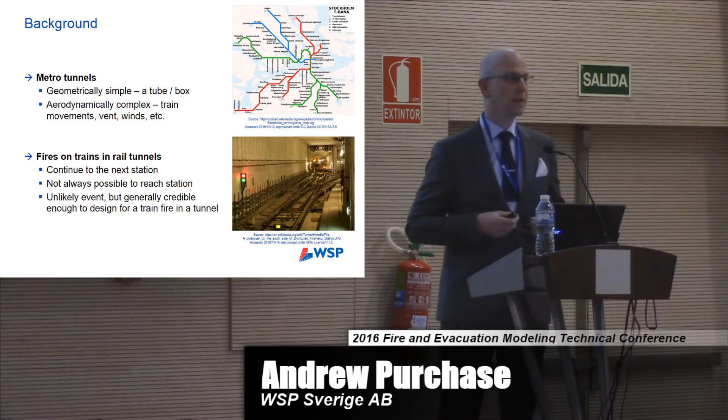Sometimes it might be the case that congestion prevents the train from getting to the next station, or it could be that a mechanical fault or the fire itself causes the train to be stuck in the tunnel, and hence evacuation is required. So whilst it's an unlikely event, it's usually deemed credible enough to provide evacuation provisions in a tunnel.

So what are typical rail tunnel evacuation provisions? Based on a survey of tunnels from around the world, there seem to be some provisions that are pretty typical. It's quite common to have walkways with emergency lighting to assist with evacuation. It's also common to have regular exits once the tunnel gets over a certain length.

But that's where it starts to deviate a little bit. Some provisions tend to vary quite a bit. The one that interests me the most is the longitudinal ventilation. I'm originally from Australia and I've worked quite a bit in the UK and the US, and in my experience at least, it's almost a given that the tunnel will have longitudinal smoke control.

I moved to Sweden about a year ago and I found that that's not always the case. I see examples where sometimes it's provided, sometimes it's not. And that was a little bit conflicting for me, given my previous experience.

The other thing that tends to vary quite a bit is the walkway width. For instance, an NFPA 130 compliant design would tend to have a walkway width of about 0.7 metres. But then there are other examples in Europe where it's around 1.2, and furthermore there are examples where it could be as high as 1.5. The walkway elevation also tends to vary.

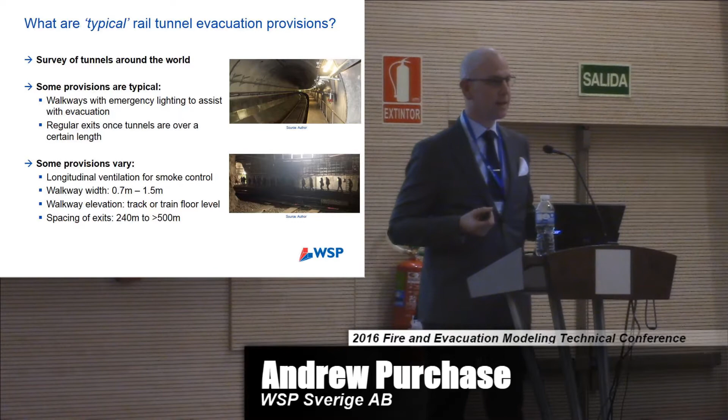Some tunnels have a walkway at track level, some have them level with the train floor, and of course it could also be somewhere in between. The other thing that tends to vary a bit is the exit spacing. An NFPA 130 compliant design would tend to have an exit spacing of around 240 metres, and that would be pretty typical in a place like Australia as well. But then there are a lot of examples when it's greater than that, so it's 300 or it could be 500 or even greater.

So why is there so much variation in what's provided in a tunnel evacuation design? Well, that's quite simple. Things vary around the world. Standards vary, people's perceptions of safety vary. Also, it could be that a system has certain constraints, so you can't provide this, you can't provide that. Or it could be that you're adding new tunnels to an existing system and it's convenient to maintain a strategy, so if the walkway is a certain configuration, you just keep with that for consistency.

I think the problem though is it can be confusing when these provisions are looked at in isolation. Sometimes you'll be working on a project and another design discipline or a stakeholder will come to you, having seen a tunnel somewhere else in the world, and they'll ask why do we have this provision, why don't we have this, and so on.

And you find yourself in the position where you're having to defend your design. You've got to demonstrate an acceptable level of safety, but also a solution that's cost effective and optimal in terms of its impact on other design disciplines. This is particularly the case for tunnels because things like walkway widths can affect the overall tunnel envelope, which then implicates the cost.

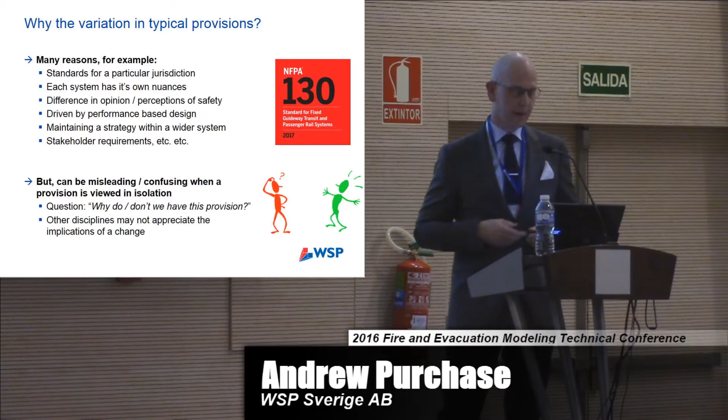Just to give a bit of summary here of what we're trying to achieve and how it could be used. What we're trying to do is investigate a range of tunnel evacuation design configurations and the impact these have on occupant safety. The focus of this is on metro tunnels, but the concept should be equally applicable to other rail tunnel designs.

The way that we did this is we did CFD and evacuation modelling and compared results on the basis of visibility, but also on the FED regarding asphyxiants.

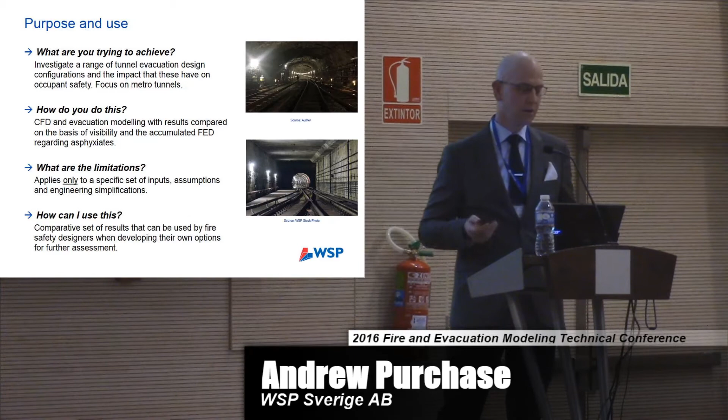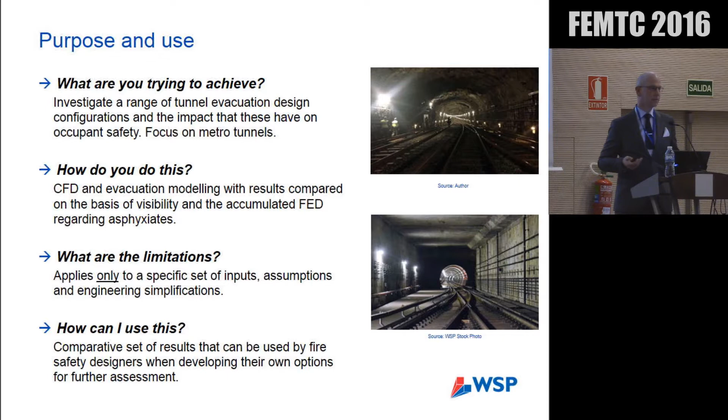As with any analysis, there are certain limitations here. We've used a set bunch of parameters and made simplifying assumptions, so of course the results here only apply to the work that we've done. It could be that if something varied, like the fire size, results or outcomes could be quite different. So the intent of doing this was to provide a comparative set of results that could be used by the fire safety designer when they're coming to design their tunnel. So it gives people something to think about more than anything.

To do the work, we had to come up with some scenarios to analyse. In essence, we did 12 CFD simulations and 144 evacuation scenarios. The table here shows a bit of a summary of the parameters that we looked at, and the ones shown in the highlighting are the ones that were actually selected.

To just touch on a couple of these, for instance, the fire location was selected to be towards the middle of the train, and this was considered reasonable when comparing a ventilated and a non-ventilated solution. If longitudinal ventilation is provided, the typical strategy is you blow it one way depending on where it is in the train, but if it's towards the middle, a judgment might need to be made. So this seemed a reasonable location when comparing the two solutions.

The fire size and growth rate were pretty much nominally selected, and of course this may not represent the absolute worst case for a metro train in a tunnel, but it's probably something that could be a credible design case.

We also looked at different grades, so a flat tunnel and a tunnel with a 4% grade. The grades here are quoted relative to the main occupant movement, so plus 4% is up towards exit 2.

We also looked at different velocity conditions: no velocity at all in the tunnel, a 2 metre per second wind applied as a pressure boundary condition, and critical velocity, which was a fixed velocity boundary condition calculated based on the equations in NFPA 502.

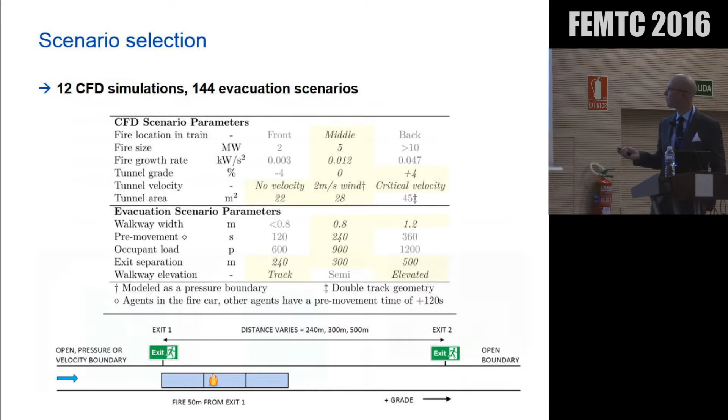Just briefly touch on the CFD modelling. This was undertaken with FDS version 6. The total domain length was 900 metres, which allowed for a 140 metre long train and exits of 500 metre separation or greater.

Each model had devices for measuring tenability, so visibility, temperature, and so on.

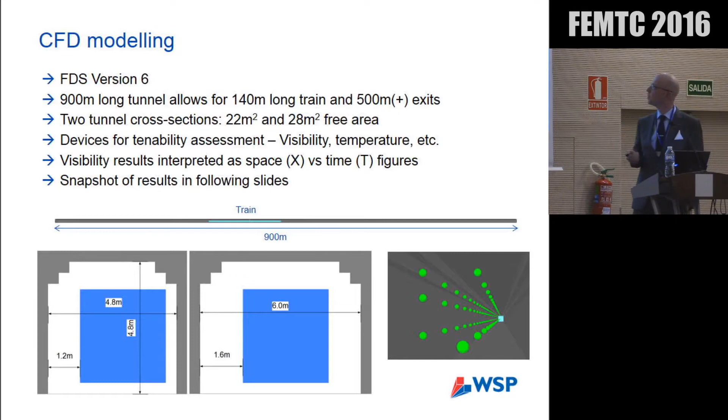The results for visibility are presented here as space versus time, or XT plots. These plots show the distance along the tunnel along the x-axis and the time in minutes along the y-axis. The train is shown as a blockage here, and the exits, or different exit spaces, are shown as vertical lines.

The colour bars have been clipped at 10 metres, so anything greater than 10 metres is shown as white, and the colour bar shows the remaining contour levels.

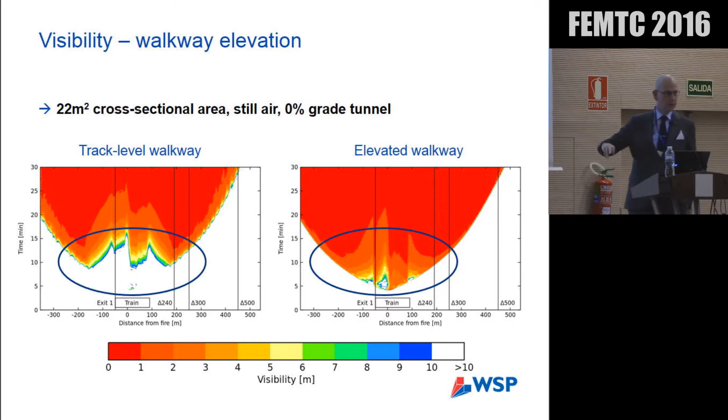So from these results, the ones on the left here are the track level walkway and the elevated walkway. Obviously for the track level walkway, results are slightly better because this is measured at 2 metres above the walkway, so it's lower in the domain and visibility is better along the walkway.

The next set of results are comparing visibility along the walkway with different tunnel grades. The one on the left here is a 0 grade, and the one on the right is a 4% grade. So visibility on the walkway varies quite a bit depending on the grade. For instance, when the fire's on a 4% grade, visibility on the uphill side is lost much sooner, whereas visibility on the downhill side is not too bad.

This is because obviously buoyancy is driving the smoke uphill and causing that visibility to be lost sooner.

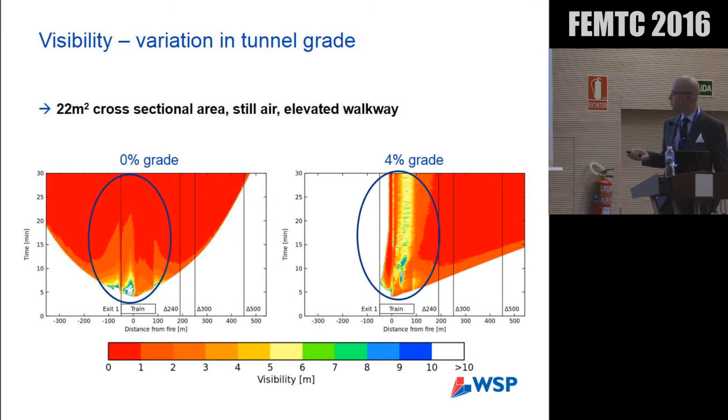The third set of results are with longitudinal smoke control. So again, the figure on the left here is in still air, so no smoke control applied. And the one on the right here is with a velocity applied on the left-hand side. What's interesting here is how similar this result is to when the fire was on a 4% grade.

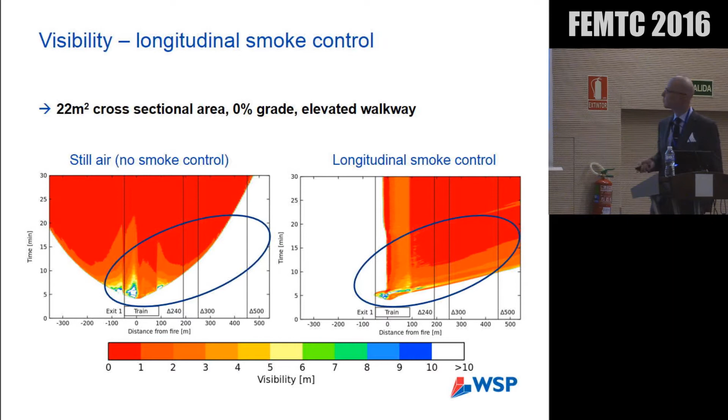Visibility is lost a little bit sooner along here, but the overall outcome is very, very similar. And then the final visibility slide I want to show is comparing the different walkway elevation with longitudinal smoke control. So the one on the left here is a track level walkway, and the one on the right is an elevated walkway. The results are slightly better for this case than they are for this, and again, that makes sense.

People are lower in the tunnel compared to this case. What I think is most interesting about these results is the visibility conditions that occur across the length of the train. So we're applying a velocity here. Then we've got the train, which causes a blockage, so the velocity becomes higher because the area is lower, and that causes a bit of dilution along there, so visibility looks a bit better. It gets to the end of the train, the flow expands, and then visibility is worse relative to across the train.

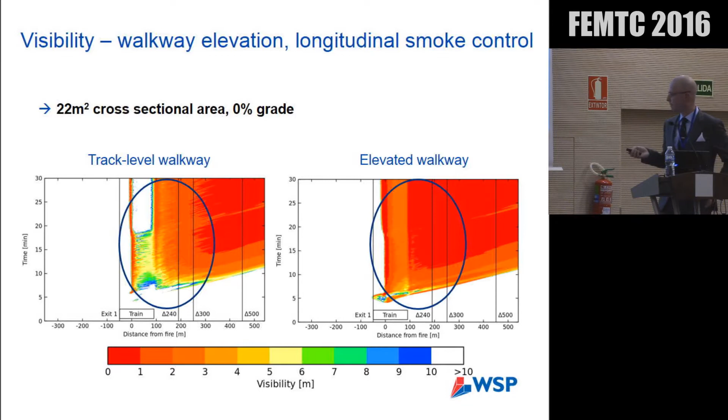So the results presented so far are for visibility, which give a good indication of smoke movement in the tunnel and tenability. But they don't really tell us how the different walkway widths affect occupant safety. So to do this, we undertook some evacuation modelling.

To do this, we developed a 1D evacuation model for rail tunnels. The reason for this was it was pretty simple to do. We've just got a straight tunnel, so the evacuation routes are pretty straightforward, and doing it this way gave us complete control over the correlations we used. We could also implement a reduction in walking speed with reduced visibility. It also allowed us to script it very easily.

So we had 144 evacuation scenarios, so we could run them with pretty much no human input once the model was set up.

The paper talks about this in more detail, but just to give a quick overview, the flow rate along the walkway was governed by the equation here from Lundström. The flow rate along the walkway with the train is a little bit less, since it's considered like a corridor, and we sought guidance from the Swedish building code for that.

The walking speed in smoke is governed by this relationship here by Fridolf. Ultimately, the walking speed along the walkway is a function of how much crowding there is, the flow rates governed by the equations above, the visibility conditions, and also the agent characteristics.

So we had 3 different agent characteristics. Some agents had a maximum walking speed of 0.8, some had a maximum walking speed of 1, and some had a maximum walking speed of 1.2.

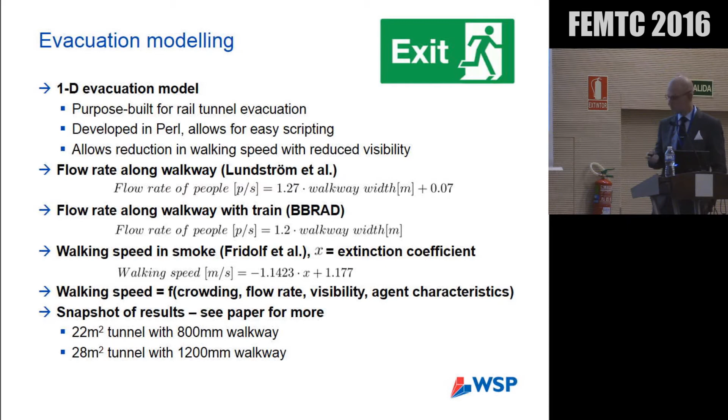So for the evacuation results, there's 4 slides of this, and I'll just explain briefly what these plots mean. I hope people up the back can see this, but the blue symbols are for 0% grade, the red symbols are for 4% grade. The squares are for still conditions, the circles are for pressure boundaries, so the 2 metre per second wind, and the triangles are for critical velocity. Along the x-axis are the different exit spacings, and these plots are divided in 2.

This side shows a track level walkway, this side shows an elevated walkway. And for each slide, there's 2 sets of results: results for an 800 millimetre walkway in a 22 square metre tunnel, and results for a 1200 millimetre walkway in a 28 square metre tunnel.

The results shown on this slide are for the maximum FID, and these have been truncated at 1. So any value greater than 1 is shown as unity here.

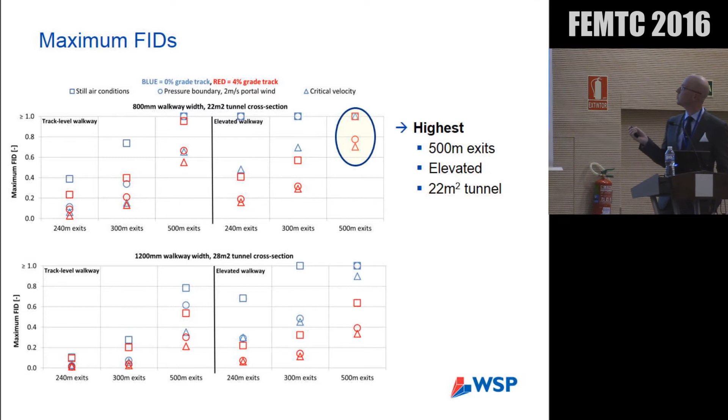The highest values are seen for a 500 metre exit with an elevated walkway, and the lowest values are seen for a 240 metre exit with a low level walkway. And that makes complete sense: the longer you have to walk, the smaller the walkway and the higher it is, the more likely you're going to be exposed to low visibility, therefore your walking speed is reduced and your total evacuation time is increased.

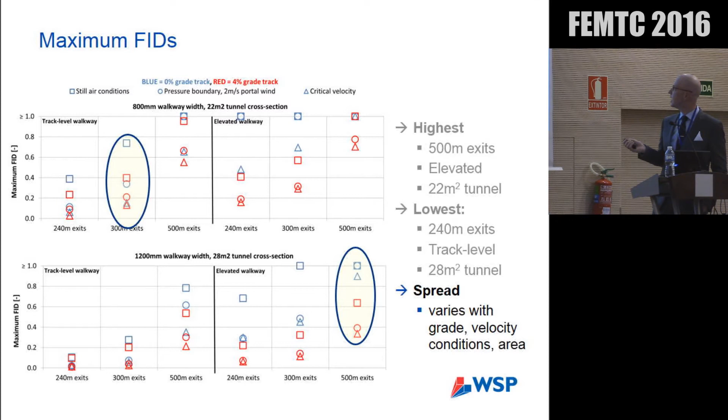There's a fair bit of spread in the results, and this seems to vary quite a bit depending on the grade, the velocity conditions, and the area of the tunnel. So it's quite a complex interaction between all those different parameters.

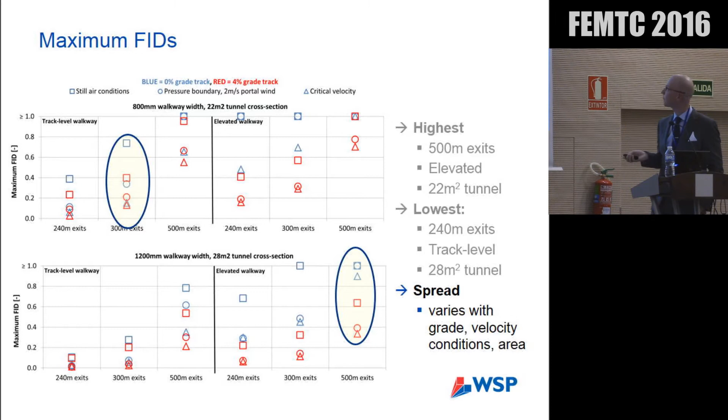The next slide is the number of people who are exposed to an FID of greater than 0.3. Point 3 was chosen because there's several jurisdictions around the world where that's a typical acceptance criteria for evacuation in a tunnel.

These values have been normalised by 600, because that's the typical number of people that walk towards the furthest exit. It's convenient to do because it normalises the results between 0 and unity.

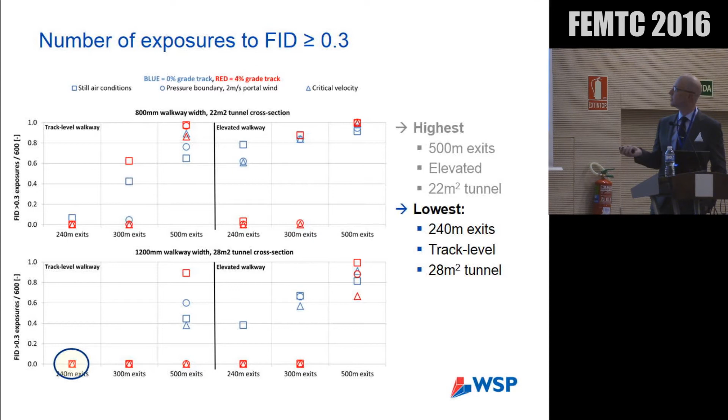The results here are pretty much the same as the last slide. The highest values are seen for the long exit spacing, the lowest values are seen for the shorter exit spacing. So pretty much exactly the same result as the last slide, which is to be expected.

This slide shows the low visibility exposures, and this was nominally selected. A person was counted to be exposed to low visibility if they're in less than 5 metres visibility for greater than 10 minutes.

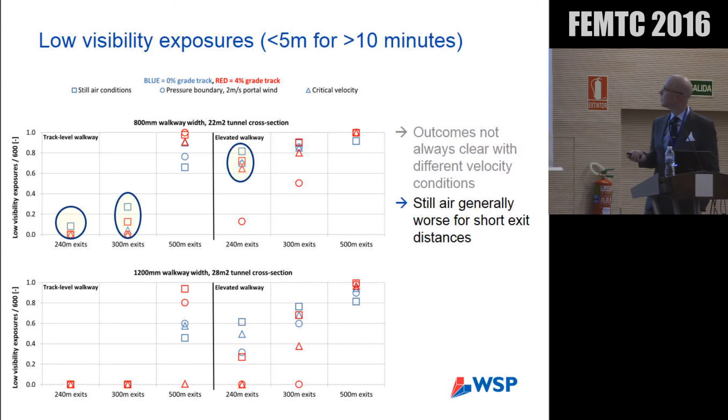For this, outcomes aren't as clear with different velocity boundary conditions. For the shorter exit spacing, it tends to be the case that conditions are worse in still air. However, for conditions where there's some airflow in the tunnel, be that from forced ventilation or due to the effect of grade, conditions tend to be worse for the longer exit spacings.

That seems to be the case that when it's a short exit spacing, relatively speaking, people are exposed to low visibility for longer, whereas with a longer exit spacing, people tend to start outpacing the worst of the smoke layer when it's still air conditions. Whereas when there's airflow in the tunnel, those people tend to be exposed to that because it's being driven across them.

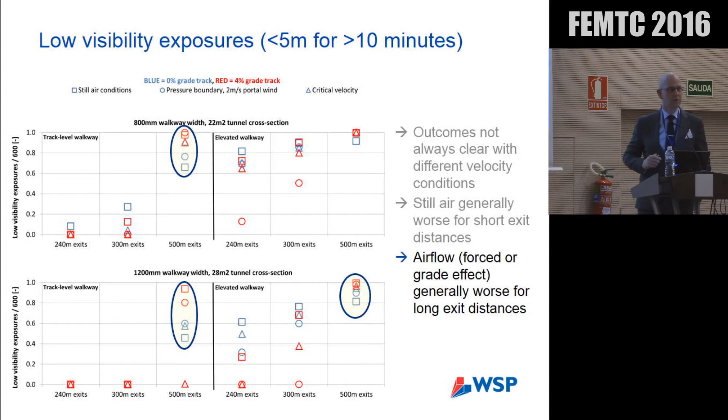The last slide is the total evacuation time. This is quite obvious: as the exit spacing increases, of course, the total evacuation time increases, because people have to walk longer to get out. And as the walkway width decreases, the evacuation time increases as well.

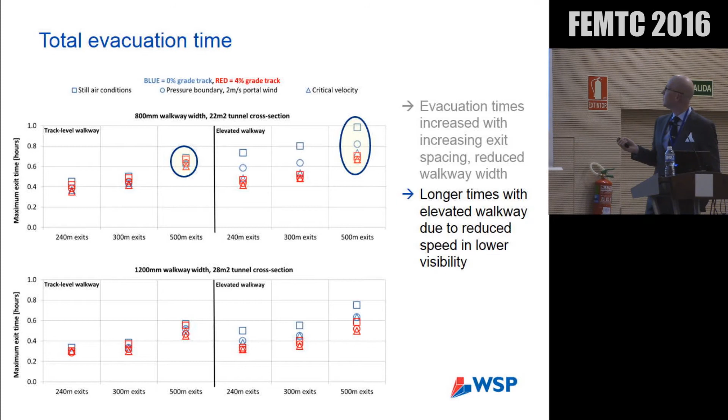So compare these results to these ones here. Longer evacuation times also tend to occur when the walkway is elevated, and that's because, again, people are higher, they're exposed to low visibility, which is reducing their walking speed, so their total evacuation time is longer.

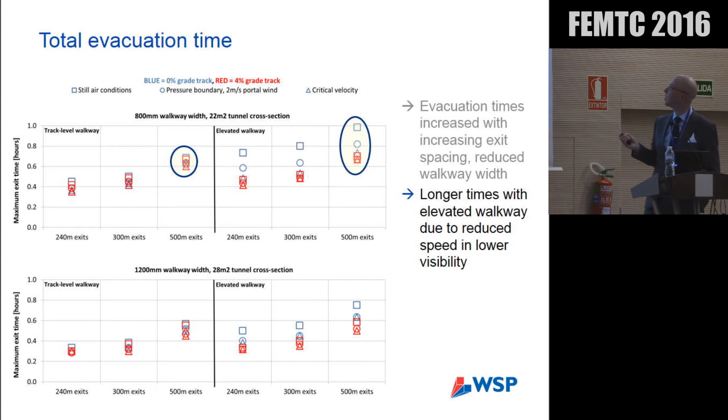The other thing we noticed was that conditions tend to be improved for a larger tunnel. So the result here has two effects: it's a larger tunnel and it's a wider walkway. But in the paper, we look at the same tunnel area with the two different walkways, and the area makes an effect. That's because, obviously, it's a larger volume, so it tends to be the case that visibility is better compared to the tighter tunnel.

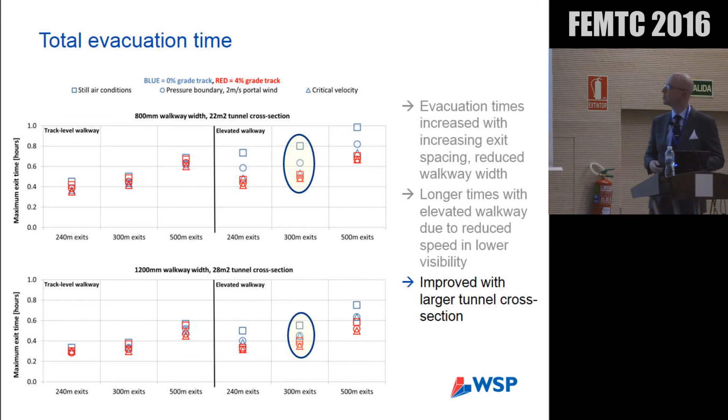Just to sum up, a lot of the results I've shown today, I think, would be pretty obvious to an experienced practitioner. I don't think there's anything too groundbreaking in them. What is challenging, I think, is that sometimes stakeholders and other design disciplines don't appreciate how much of an effect a change can have on the fire safety design.

So based on the results I presented, an increased exit spacing and reduced walkway width reduces tenability, while a decrease in the exit spacing and a wider or lower level walkway increases tenability. And that's pretty obvious - I don't think people need to model to understand that effect.

What I think is interesting is the effect that tunnel grade has and how much the area impacts the results. I think it's important that when we're modelling these things, those things are accurately taken into account. I think it's also important to understand the different outcomes with different velocity conditions.

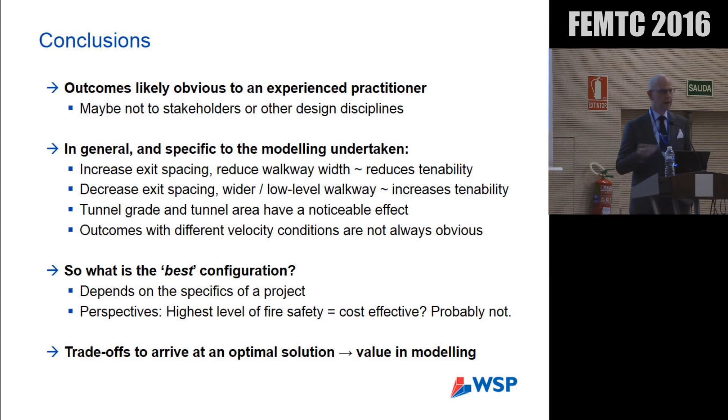I think it's really important when you're looking at tunnels that you either resolve the velocity boundary conditions well, or you look at a range of conditions that it could be, because what happens at the time of the fire could vary from anything from completely still air to meters per second of airflow.

So that lends the question, what is the best configuration? Well, there's no answer to that. It really depends on the specifics of each project. So I'm not standing here today advocating that any solution here is the best solution. It really depends on the project that people are working on.

If cost and there were no other constraints, then obviously short exits and wide walkways would be the best solution, but that's never the case. We always have to do trade-offs to arrive at an optimum solution. And that's really where the value is in modelling like this. We can come up with that solution in a relatively short period of time, I guess.

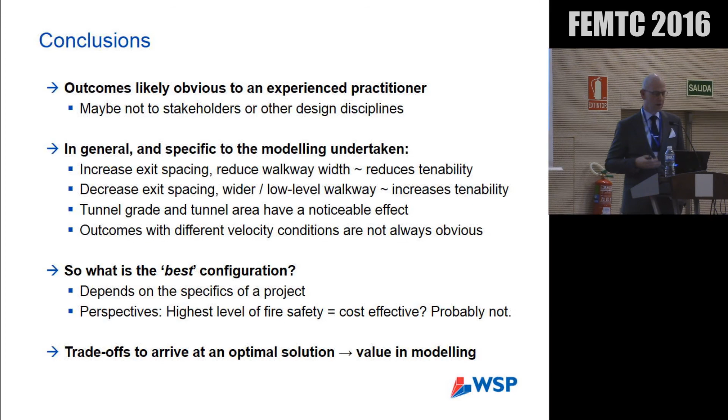Did you take into account the time to get out of the train? Because usually it takes quite a long time just to be able to get out of a very crowded train. And also, I saw that the low-level corridor showed similar evacuation times when I was expecting that just getting out of the train into a 2 meter below corridor would take more time, and it's accident prone as well. So I don't think it would be a safer situation.

Yep, so that was one of the parameters that we kept constant, and we talk about that in the paper. We wanted to kind of rule out a few variables because there was already a lot of variables to consider. So the evacuation time for the train is kept constant, and those type of considerations, I agree, you need to look at as well, because the time out of the train and those other things would come into play.